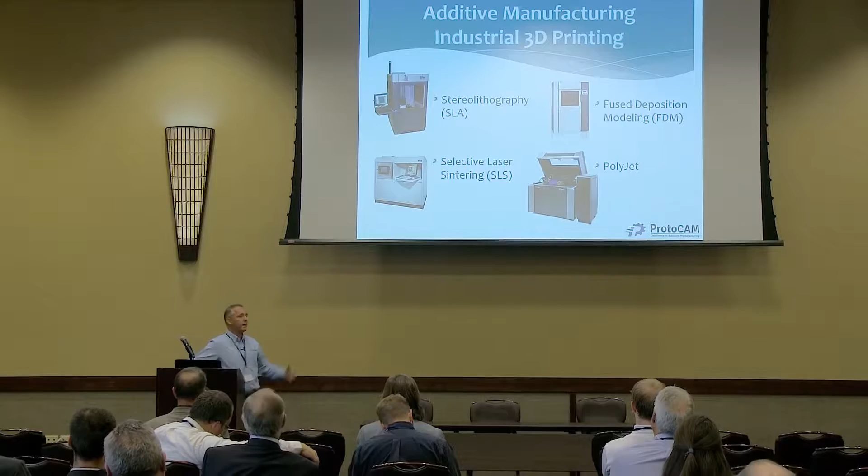We specialize in four main technologies: stereolithography, FDM, selective laser sintering, and PolyJet.

So there's two ways that you go about making a part: subtractive versus additive. Since the beginning of time, cavemen have been working on the subtractive aspect, whittling away something to create something. Also since the beginning of time, people have been making things in an additive nature, layer upon layer, building it up and creating a product from it.

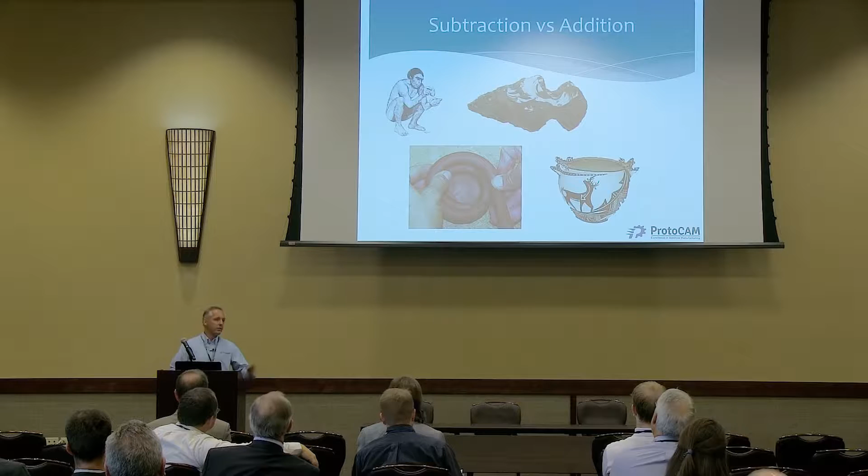So we're going to start and focus specifically on the additive side of this process. Just a brief history - contrary to what Brian said earlier, this is not a new technology, it's an old technology. Well, I'm 42 years old. I don't like to consider myself old, and this technology is a lot younger than me, so I'm going to say it's still a new technology. If I'm 42 and I look at somebody 20, I'd say they're very young. So I'm going to consider this a young technology still.

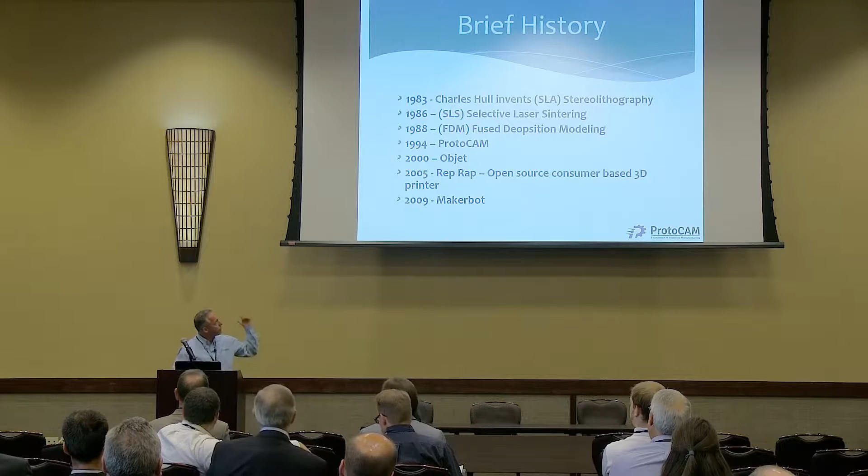I'm not going to run through each of these bullet points because it was covered earlier pretty well by Brian. The one thing I will say is that ProtoCAM was started in 1994, so we have been in this business for 22 years. I can relate a lot to the guys at Imperial when they were talking about bins of bad parts. Well, over 22 years, we have truckloads of bad parts.

But we've learned an awful lot, and I can definitely relate to what they were talking about. One of the things we do at ProtoCAM is when we fail at a build, we go at it until we get it right. We really pride ourselves in that. We don't give up on projects, and we really work hard to get them right, and our experience helps that.

Additive has made it to the big league. It's got its own definition now in the ASTM. It's a process of joining materials to make objects from 3D models, layer upon layer, as opposed to subtractive. Another name for it is 3D printing. The first thing necessary in order to do any 3D printing or additive manufacturing is the need for 3D CAD.

Of the 3D CAD file, it's important to have an STL file. The analogy I have here is if we were to take this part and throw it onto this meat slicer, we would slice the file up into layers, and that's the process of additive manufacturing, building a part one layer at a time.

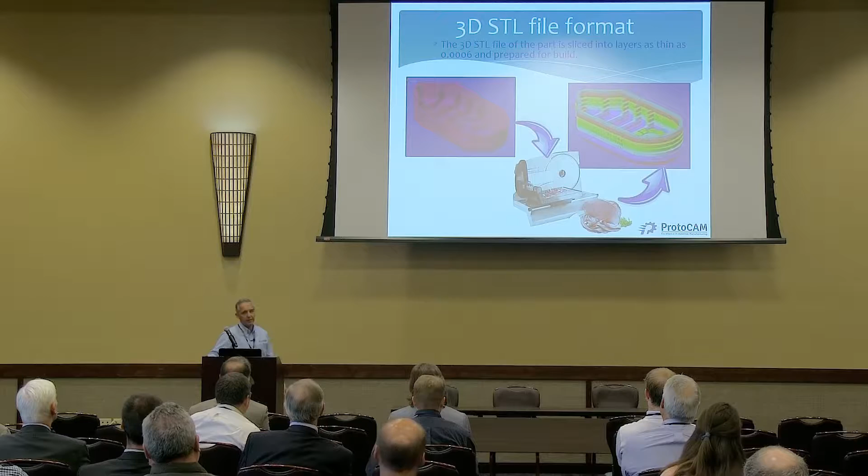There are a lot of different CAD programs out there right now that have the ability to create STL files. Autodesk is becoming a big leader in this industry. When I started years ago, Autodesk and AutoCAD were very low-key, they weren't really in the 3D world, more architectural. But now with a lot of their generative CAD modeling programs, they're really becoming a leader, getting into the industry with printers and platforms for running them. They've become a big player in this industry.

SolidWorks, obviously, Creo, the former Pro Engineer. On a consumer level, if you don't have those capabilities for the high-end CAD programs, there are a lot of consumer-level programs out there you can download. They're free, pretty interactive, and you can muddle something together and build something.

If you have no CAD skills, CAD experience, or no desire, you can go to one of the many community STL sites out there: Pinshape, Sketchfab, GrabCAD. Probably the leader is Thingiverse, and you can see they have great products like a six-pack holder that you could download. I mean, who doesn't want one of those? I go there all the time for stuff like this, this is really good stuff. So if you don't have those CAD skills, get on Thingiverse.

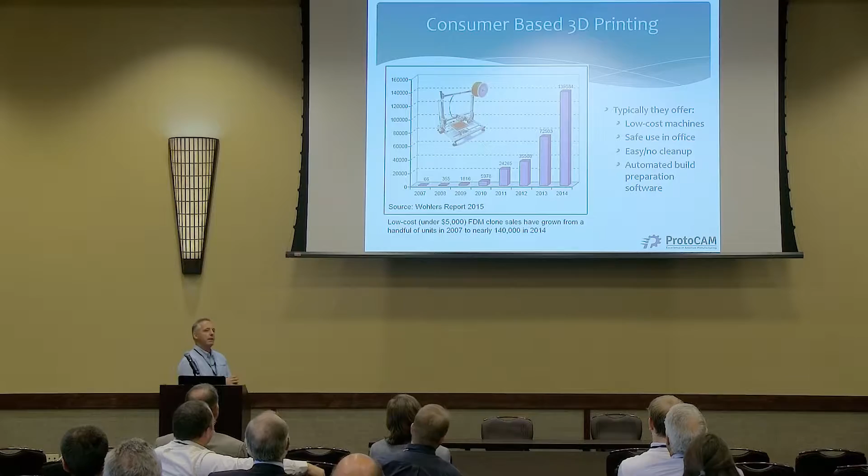So the consumer-based 3D printing, this was the hype curve, you can almost see this going right up. In 2007, there were only 66 units sold. By 2014, there were 140,000 units sold on a consumer level.

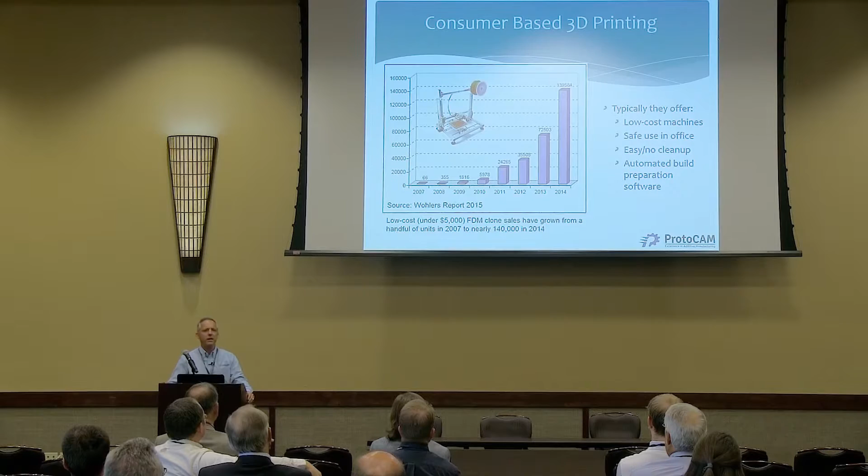People would ask, aren't you terrified of that? This is your business, aren't you scared of these consumer levels coming out and taking over your world? And no, we actually welcomed it. It was like, well, let them do it, let them bring it in, start getting used to it, start using it, see what the capabilities are, see what's achievable. And it really did.

I think we've seen a growth in business when these came out because people did two things with it. They said, hey, this isn't for me, I don't want to be in this world. Or, hey, this is for me, and what I'm doing is great, but I really need the next level type of products. I need those higher materials, I need the things coming off the industrial level printers. So it was really a benefit for us.

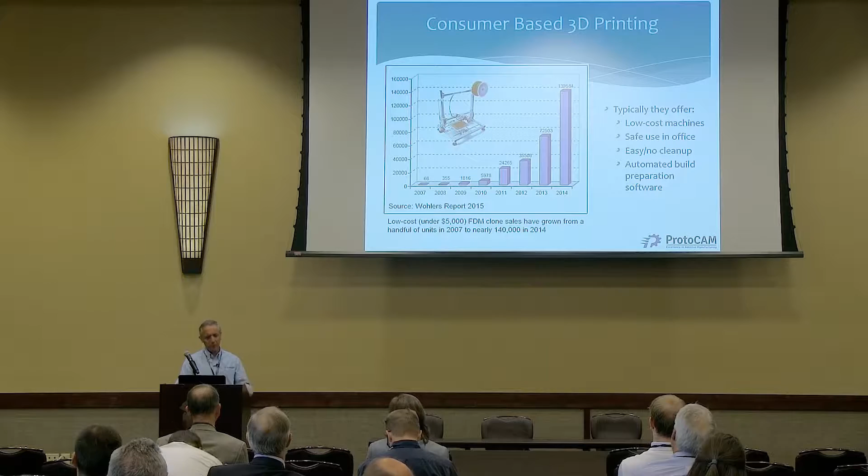They come off with low cost, safe to use, easy to use. Talk to a lot of people who run MakerBots or Form 1s, and you can ask them about the ease of use. But it really fueled the fire for us. And that's where we're going to get into the industrial side and start diving into that.

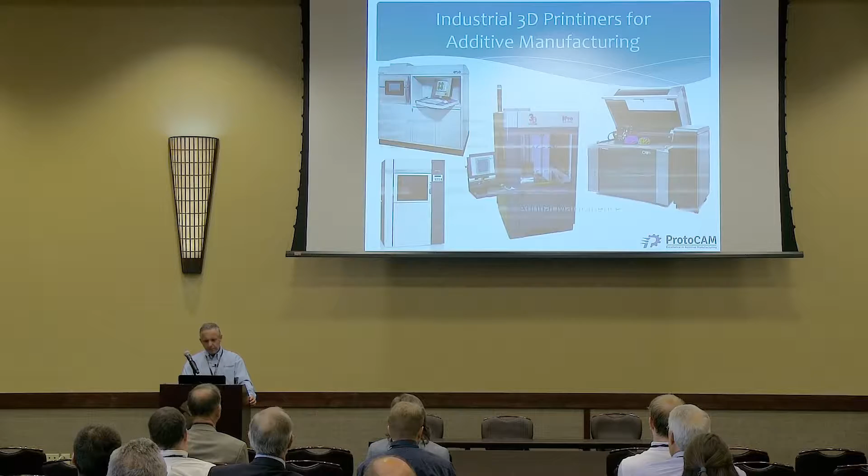The first technology I want to talk about is stereolithography. You guys probably have heard that enough today to know exactly what it is and what it's all about.

But there are several different manufacturers when we're talking about stereolithography systems. 3D Systems, with Chuck Hull the inventor, is the biggest one by far. EnvisionTEC is another really big player in the arena, they have some nice systems. Theirs is not laser-based, but more DLP, and they actually do a Blu-ray type system as well.

Prodways is a new company that's coming out, based in France, and they haven't been on the market very long. They're doing large frame DLP systems. Most DLP systems have traditionally been consumer level, and they said because it's not a scalable technology, it's very difficult to scale DLP. But Prodways has come up with a way to do it, and it's pretty good because you're covering a lot of surface area really fast with DLP versus a laser tracing every point of geometry.

So there's some real benefits to that. It's just whether or not it's a reality, I don't know. I haven't seen any parts off of it. Large frame systems, you're talking in the range of $650,000 for a unit. These are not inexpensive pieces of equipment.

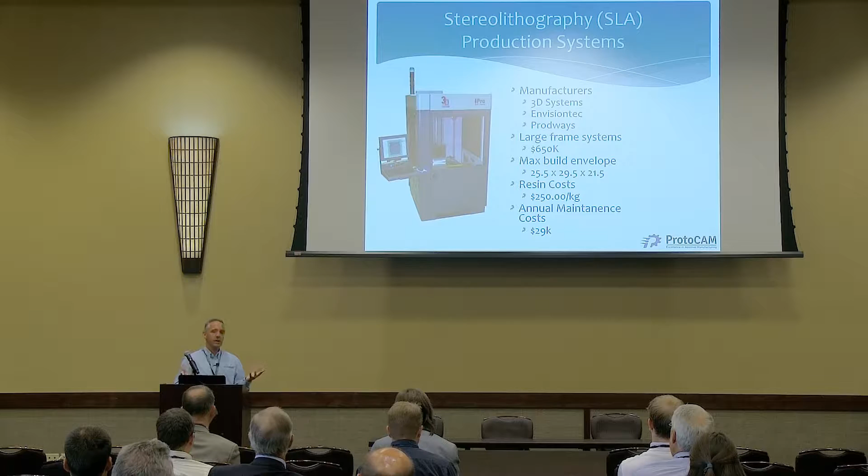Like we heard from our friends at Imperial, auxiliary equipment, there's a lot more that goes into this than just this $650,000 for the SLA machine. You can look at the build envelope here, we're talking 25.5 by 30. Resin costs, again, $250 a kilogram. And then there's also maintenance costs that go along with this equipment.

On a consumer level, stereolithography is still there. There's a system out here on one of the tables, the Form 1, that's a laser-based consumer level SLA. You have the Spark by Autodesk, and there's some other DLP-based systems out there as well.

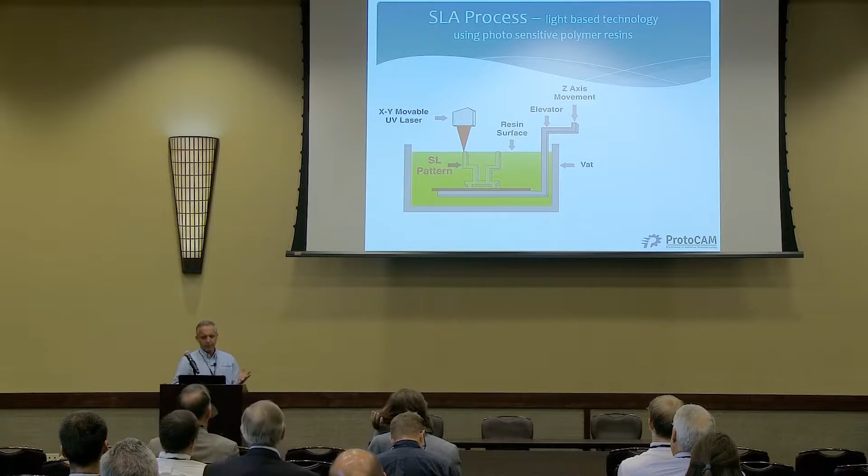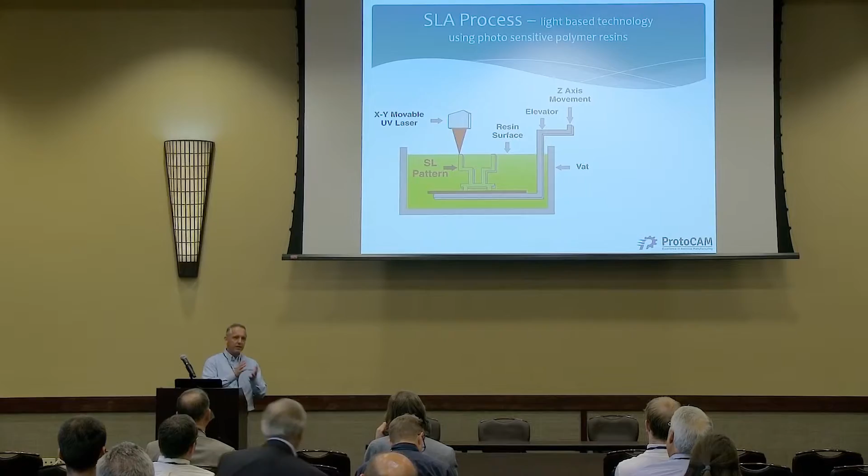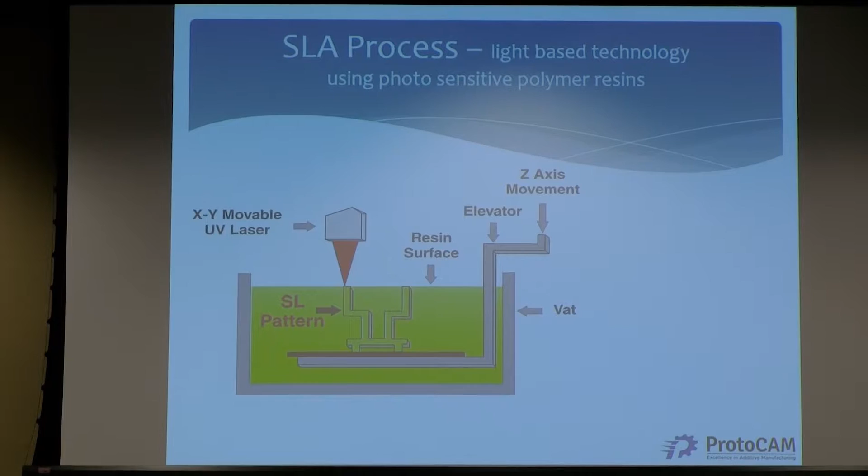So the process itself, how does stereolithography work? We start with a vat of liquid photopolymer. We take our CAD file, slice it up on that nice meat slicer, draw the laser into the vat. Everywhere the laser hits the vat, it starts to build and solidify the resin. The elevator lowers as it goes, and this continues one layer at a time until the part is complete.

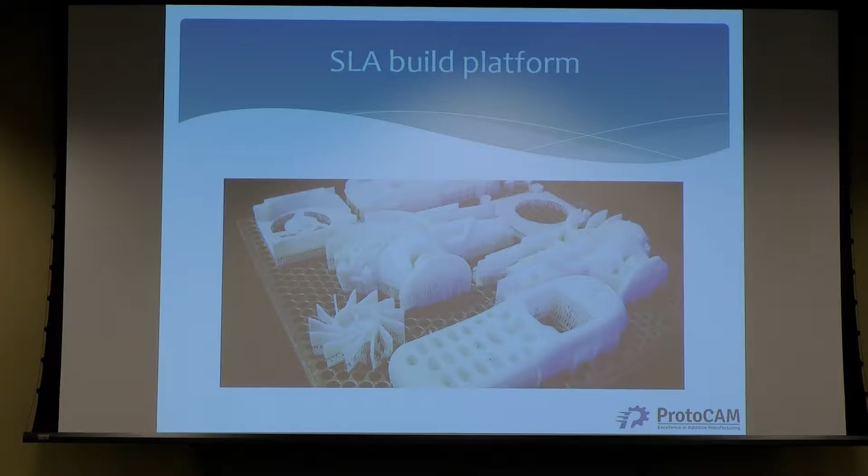They talk about just hitting print and out comes a model. Well, the supports are the dark side there, and I believe with your $125 paid thing for today, you get to see me again tomorrow, and I get to go over all of the post-processing. So this is a good deal. This is a good deal. This is better than like a Ginsu knife here. So maybe not better than a ShamWow, but definitely a Ginsu.

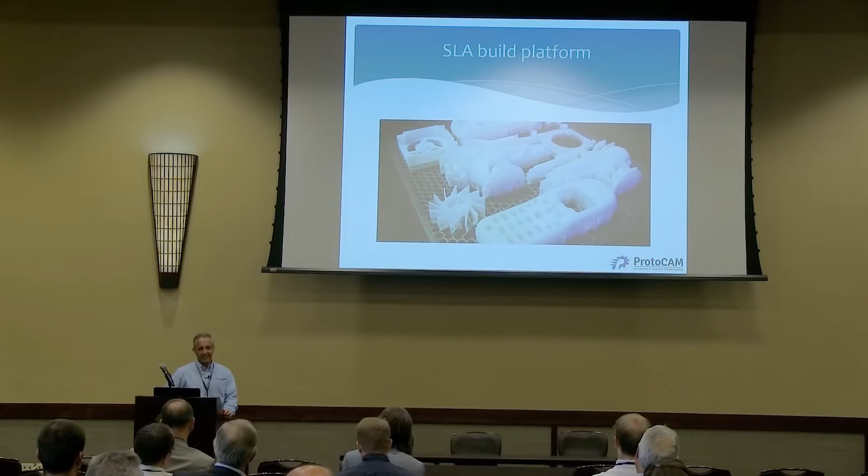Advantages of stereolithography. The biggest one by far is the dimensional accuracy and the smooth surface finish. They're the two characteristics. Every time you hear anybody talk about stereolithography, they are the characteristics that come out shining every time. The nice thing about it is that parts can be sanded, they can be painted, they can be dyed, electroplated.

If you had a chance to stop at our booth, there's lots of samples out there with stereolithography parts. Some of them may not look like stereolithography parts, so ask and we will show you all of the different parts, which ones are not, because we do a lot of painting and post-finishing work at ProtoCAM, and a lot of the parts out there are in fact stereolithography.

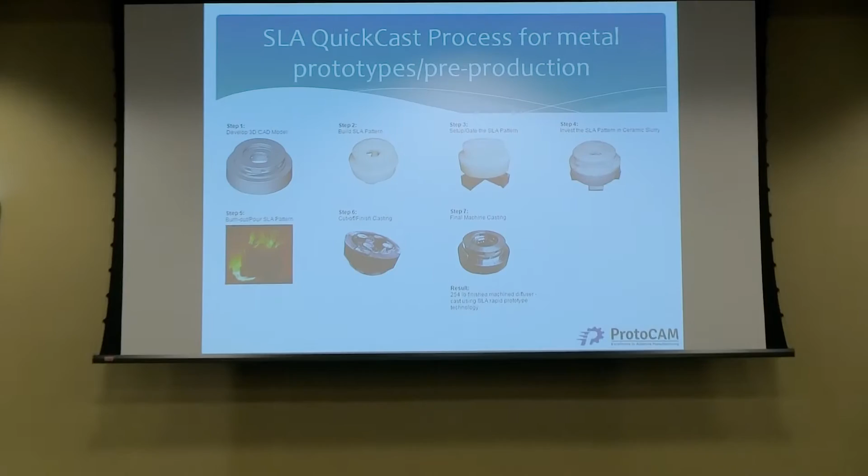A foundry will take that and dip it into ceramic, just like this is for the investment cast process. They'll dip it into ceramic, coat it one layer at a time, build up this big shell on it, then they'll fire that shell, burn the SLA out of it, and then inject the metal inside of the cavity, and then you have a metal prototype.

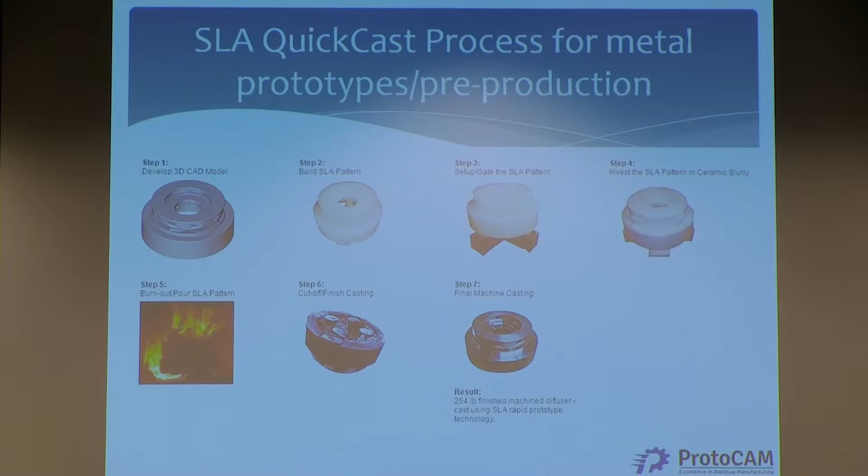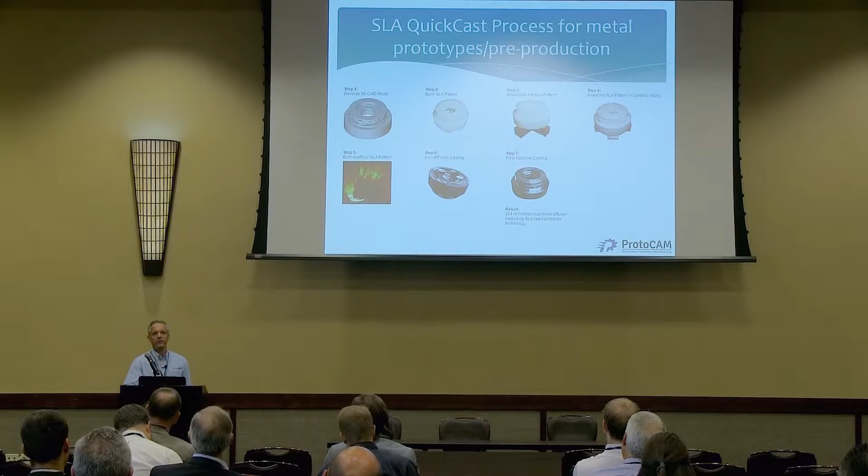I was recently at AMUG, and I was involved in a presentation where they were talking specifically about QuickCast, and they said that stereolithography is still by far the leader in investment casting technology. 80% of investment cast prototype parts are using stereolithography. There are some other technologies out there - you can do wax patterns, you can do voxel jets, other technologies, but by far stereolithography holds that industry.

So the next technology you're going to get into is selective laser sintering.

3D Systems is a major manufacturer of this type of equipment. EOS is probably on top of them by now, I would say - I don't know, in the market. EOS is probably on top of 3D when it comes to polymer-based selective laser sintering. And Prodways has entered that market as well. I think they had some people that left 3D and went to France, moved around between companies, and wound up at Prodways. So you're probably getting the same machine, just out of France.

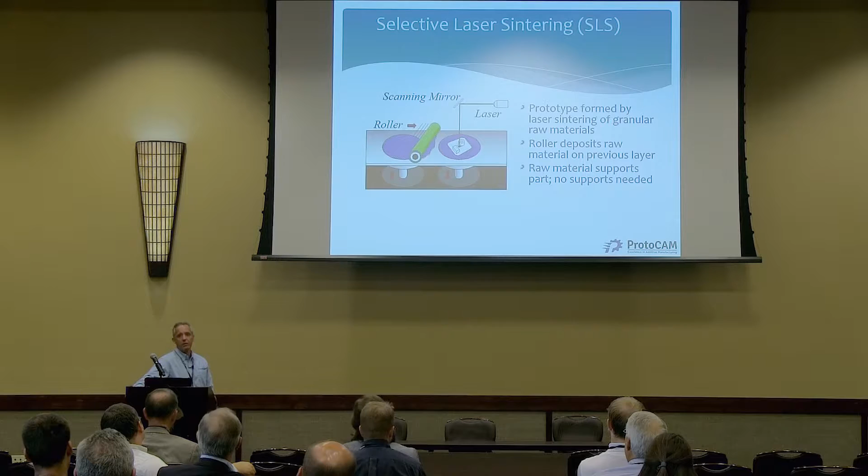This is a typical build tray. If you see most build trays of other technologies, including stereolithography, they're a single layer, a single array. With SLS, you can actually stack, stagger, pack everything into this box, so you can really fit a lot of parts into one build.

Now, keep in mind that one build is going to take a really long time to build. One other thing that goes along with SLS, which I'll get more into tomorrow with the post-processing, is that every hour of build time, you have an hour of cool down time. So if I built this whole box in 10 hours, I have to let it sit in the corner over here for another 10 hours before I can touch it.

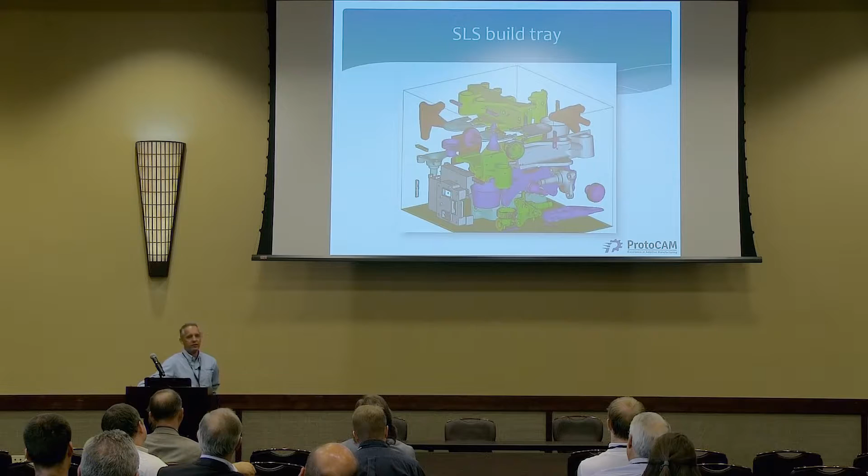Some advantages of SLS: again, these are highly durable parts. I mean, these are nylon material. They have high heat capabilities, no supports needed. You can build some really complex geometries, and there's a variety of materials.

Again, the nylon 12, there's a glass-filled version. Nylon 11 is a more flexible version, so you can do things like living hinges with it. If you have a lot of parts with snap features, things like that, they're really going to take abuse. The 11 works really nice. There's a big push right now in the industry to develop a nylon 6, which is very attractive for the automotive industry. It's a material they use on a daily basis. It just takes higher heat to process it. It's a little bit more challenging. But I think BASF just partnered with Prodways, and they're going to be working together to bring PA6 available.

Where is it used in additive manufacturing? Same scenario, an air duct for a Boeing plane. This is where they're using it. You can create really complicated shapes and design some really intricate things with this process because of its no supports and the freedom with the design, as well as the balance with good mechanical properties. Really, this lends itself well to selective laser sintering.

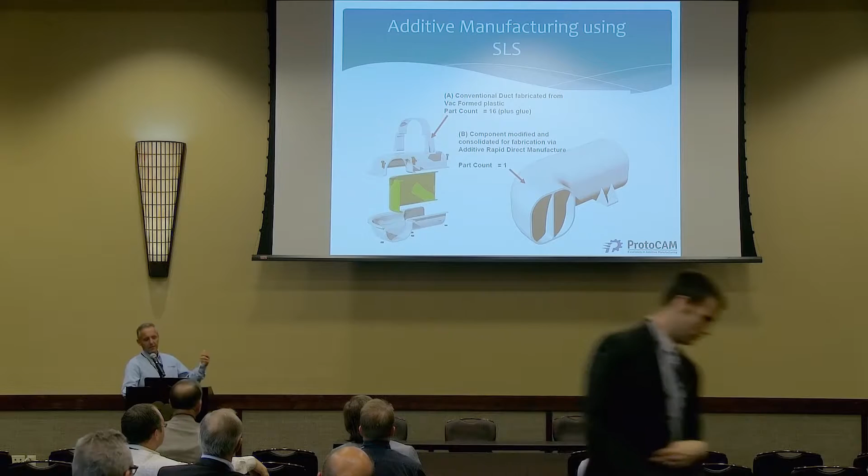Just as a real quick analogy, or a case study you could say, if I were to take the example shown here and build this part, this duct, conventionally, this would make up approximately 16 pieces. You're going to have a top piece, a bottom piece, a baffle in the middle, a bracket that goes over it, the screws, the hardware, everything involved. With this technology, I can reduce it down to one piece. So aside from it being lighter weight, probably more efficient, and just a better part overall, look what it does to everything from a whole company standpoint in terms of inventory control.

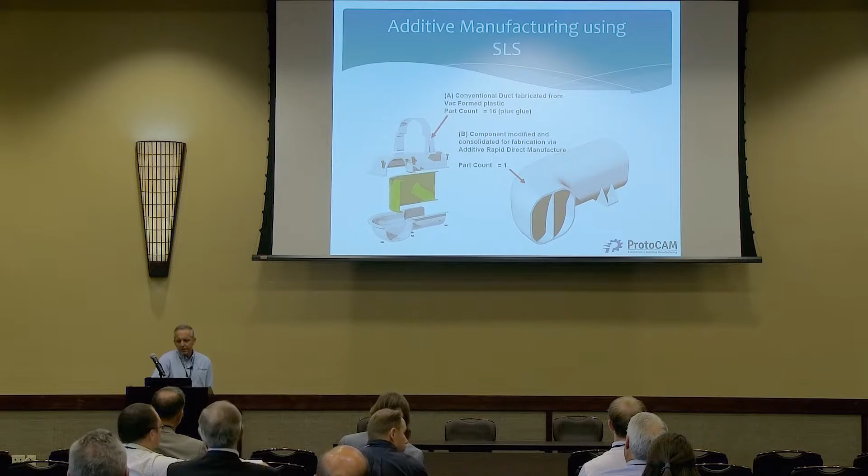You don't have to have all these parts on control anymore. Supply chain management, look how it affects that. It affects every aspect of it. So that's why there's a big push to start taking a look at parts from all these industries and saying, what other parts can we take here and reduce the part counts down. Like Brian mentioned earlier, we're going to reduce the part counts down. Yeah, that part is a little bit more expensive, but it's lighter weight, so that equates to fuel savings. And when you're talking to aerospace, fuel savings are everything. If you can get parts weight down, reduce part count, inventory, supply chain, it's really a win-win. It really is. Selective laser sintering really lends itself to that.

And I think that's why a lot of them get into it. What they really should be asking is, what is our application? What is our need? What are we trying to do here? And then going out and determining the right system for it. But I think it works a lot of times the opposite way right now. People are saying, hey, we want to get into additive, let's get a machine, what do you want to get? Well, let's get an FDM, that sounds good. And they don't really understand why or what it's about.

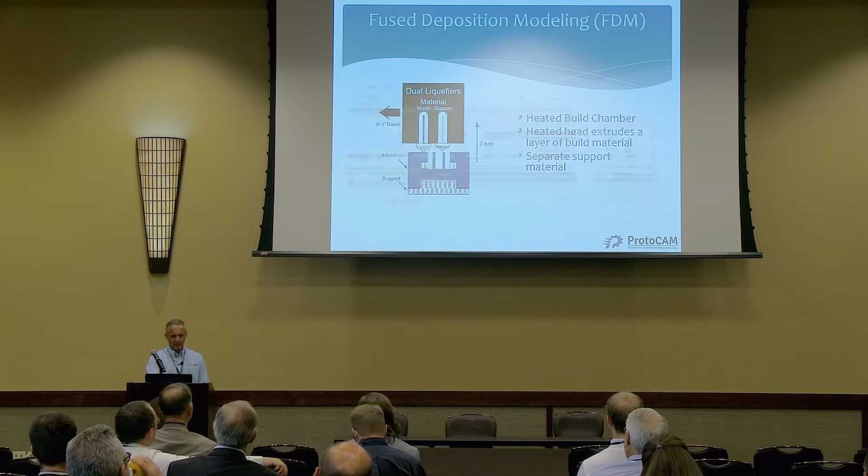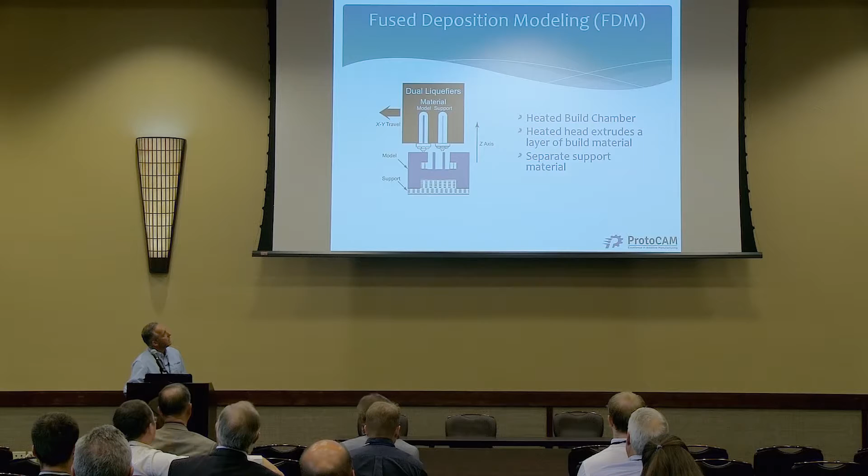But it was true, that's how it all started. Again, the process itself: you're taking two extruder nozzles, it's the hot glue gun analogy. Two extruder nozzles heat the material up, run it through, squirt it out, lay it down layer by layer. There's a model material and a support material. Use one of each and build the part up one layer at a time.

This is a sample build tray off of an FDM. Again, it's a single array. If you were really fancy you could put parts on top of parts and get creative with it, but traditionally that's not how it's set up to do. So it's a single tray.

There's that bee again. I don't know where he came from, but he's back.

So some advantages here: durable parts. FDM makes strong parts, that's what it does. There are two technologies out there that make strong, durable parts - SLS is one, FDM is the other. They have durable parts, high heat.

The nice thing about FDM is you can do things like sparse builds, build hollow structures. Maybe that's why the bee's there - it looks kind of like a beehive or something. Maybe that's what he's there for. I don't know, but you can build hollow structures.

Again, we have some parts on our table you can take a look at where we stopped the build prematurely so you can see what this does. And this makes lighter weight parts, possibly more efficient.

The nice thing about this technology, when working with some of the ABS materials, they have dissolvable supports. So you can take the part, hit print, throw it in there, you're done, got a part. Some of the higher engineering resins, not so much - the Ultems, polycarbonates, they're breakaway supports. So now you're building a part and physically breaking the supports off the part. And that's real fun sometimes.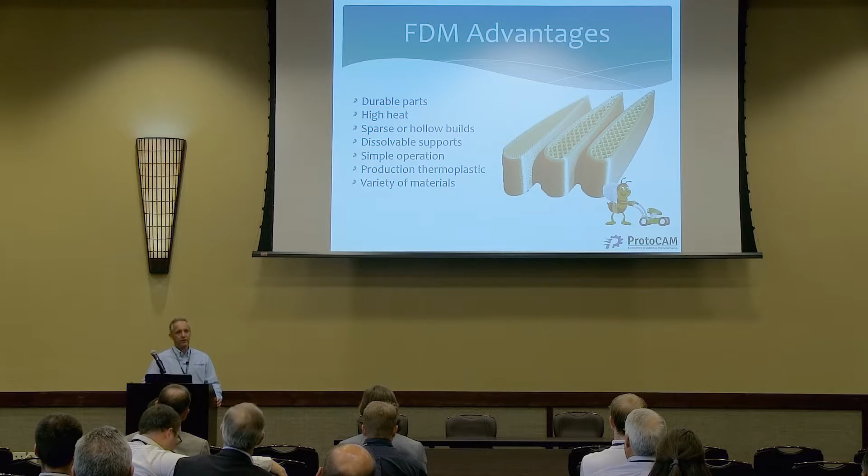Again, there's a variety of materials. These are all materials that anybody in the injection molding world is familiar with - ABS, polycarbonates, Ultems. They come in spools, much like your weed whacker wire. That gets loaded into the machine, fed through, and extruded out.

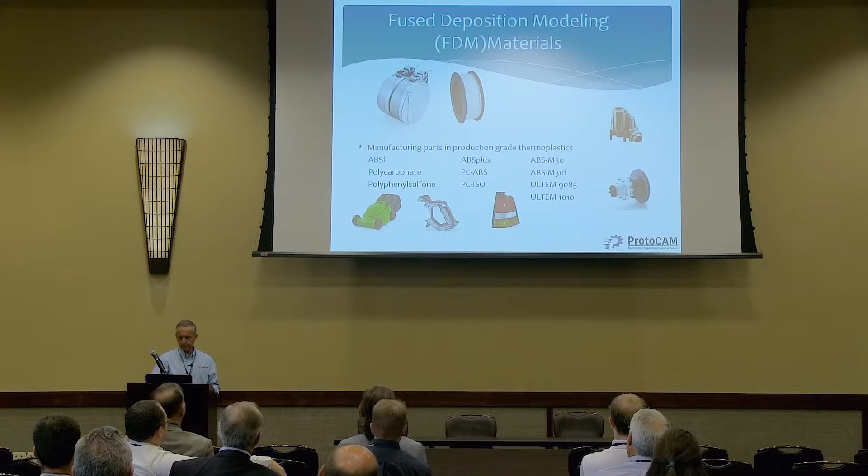Where I've seen FDM really used in industry as a true additive manufactured part is definitely in the realm of jigs and fixtures. We talked about that a lot today, you've heard that a lot today. And jigs and fixtures is a big part of FDM business.

The nice thing about it, again, is you have a lot of color choices. I've been in places where first shift has all yellow parts, second shift has all blue parts, third shift is all red parts. End of arm tooling - anybody involved in injection molding knows FDM works great for that. FDM is a real big player in that industry, and that's where I see it grow the most.

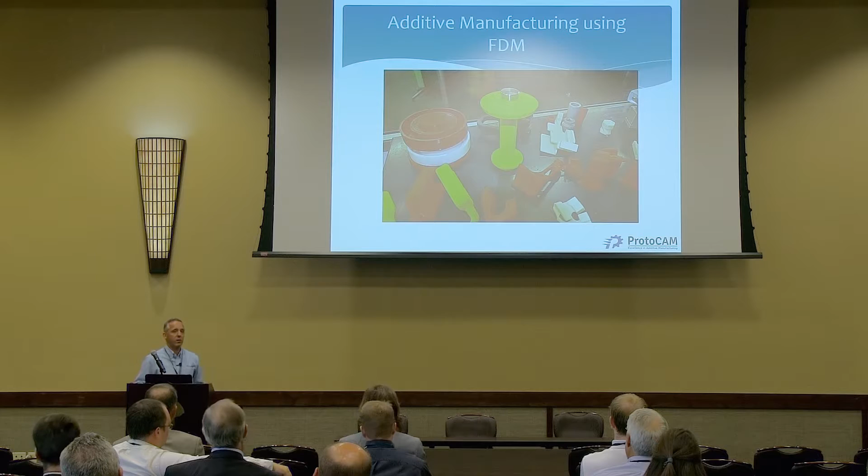So the last technology we're going to cover is PolyJet. PolyJet was owned by Objet, who sold to Stratasys. A large frame machine from them is, again, in that $400,000 range. Max build envelope on a machine like this is 16 by 20.

Resin costs are going up on PolyJet - $350 a kilogram. And that's the most expensive resin of all the technologies at this point. Maintenance costs are a little bit lower.

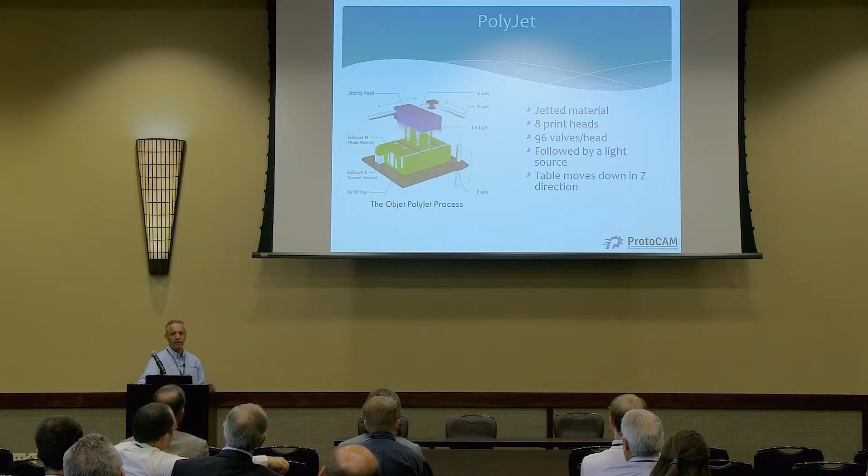The PolyJet technology is a jetted process. There are print heads along the top of the machine, 8 print heads that line up. Each print head has 96 valves, each valve spits out dots per inch. It runs just like a 2D printer, spitting out material in dots per inch, followed by a light source. Every time a dot is dropped on the table, it's cured by the passing of the light source, one layer at a time. The table moves down, and it continues the process.

An example build tray of PolyJet parts - again, it's that single layer, single array. You could probably get fancy with this and put some parts on top of each other if you wanted to, but it's really not the premise behind the technology.

Some real advantages of PolyJet are the high print quality. PolyJet prints compared to stereolithography in terms of wall quality and accuracy. If you want really nice wall quality, presentation models, good surface finish, PolyJet is the answer, if that's what you're after.

The other nice thing is it's the only system that has a real variety of materials. It has the ability to blend materials. Right now we have a Connex 3, we can load 3 different materials in at one time. Stop by our table and we can show you examples where you can build multiple durometers across the same platform, across the same part, all at the same time. It's really cool stuff. They're coming out with new materials - you're blending not just hard and soft to make elastomers. They have a digital ABS material that combines strength and surface quality.

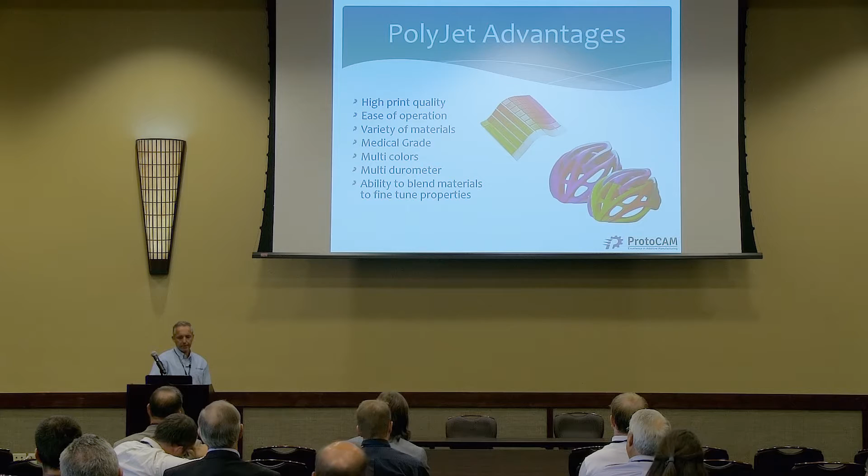So this is not meant to compete with injection mold tooling. It's done to compete with the speed of getting a real injection molded part quickly. So the way to do that is to print your cores and cavities off, load them in the machine, and run some samples.

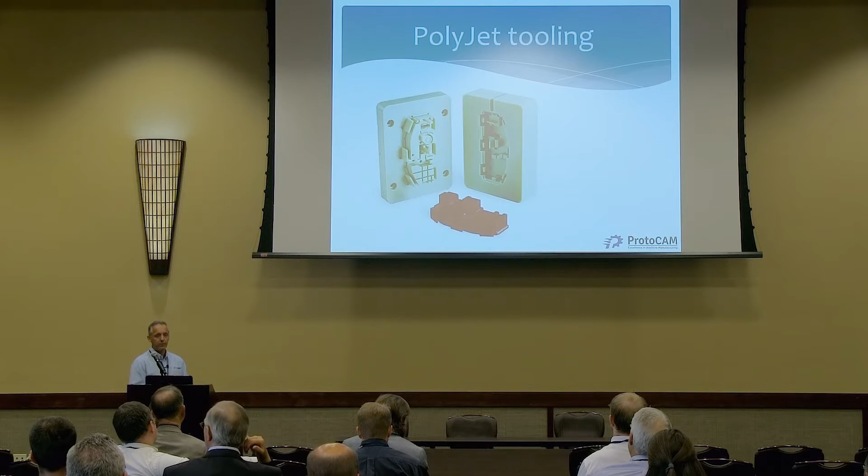I talked about the blend of quality and strength. Traditionally, there's always been this battle: I want a strong part, something really durable - where do I go? You're going to go either FDM or SLS. I want a really nice part, nice quality - where do I go? SLA. Well, to me, PolyJet with the digital ABS really blends those two together.

You can see at our booth back there, we have some examples of this. I challenge you to go back there, pick some of these parts up, flex them, clip them, see what they're all about. Because in my eyes, this is definitely the one technology that really combines strength and wall quality into one, by far more than any other technology.

Where this is used in additive manufacturing - seen this earlier - these are hearing aids. They have a medical grade material, and they also have a medical grade that is skin tone. They're taking molds from people's ears, scanning them, and creating custom earpieces. This is a great application of mass customization and additive manufacturing.